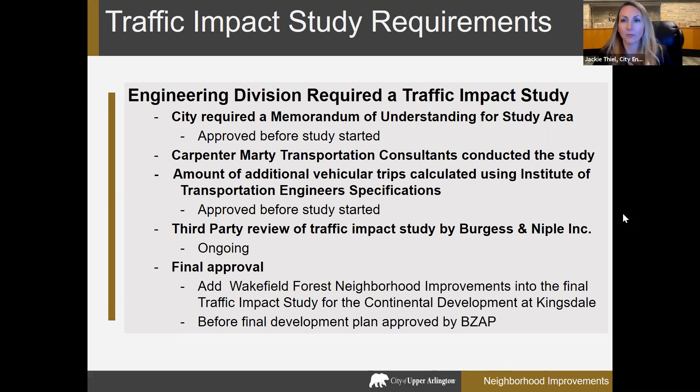And then once the traffic impact study is approved and some other things are worked out, they can take the final development plan back to BZAP for approval.

So the recommendations for improvements related directly to the development that are in the traffic impact study today are, again, improvements to the 5 Points intersection, adding an additional right turn lane on Fishinger eastbound, and extending the turn lanes on Tremont Road southbound. Additionally, we'll be adding fiber to interconnect all the traffic signals between Zollinger and 5 Points so that they can talk to each other. That improves efficiency with the signals and makes it so that when you're driving the corridor, you don't stop at every single red light.

And then a new signal at Ridgecliff Road is proposed there, and a new pedestrian crossing median at the north end of the site. Again, we show that traffic calming at Trentwood, and relocating the current signal on Northwest Boulevard approximately 65 feet south of its current location, to have a perpendicular driveway into this area now, and then signal timing adjustments to the traffic signal at Northwest and Zollinger.

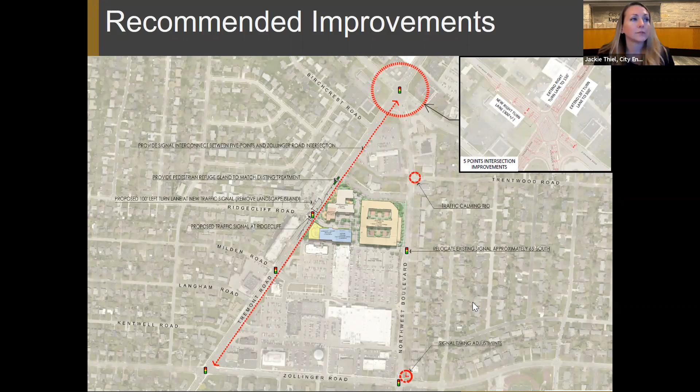So after the last meeting, I heard and listened to many of you, and I know that you wanted to see additional traffic counts and traffic data on the east side of the neighborhood. So we did complete that. And what I tried to do with this map, I know there's a lot of information here, and this will be available for you guys to review after the meeting. We'll send you all links to all the information.

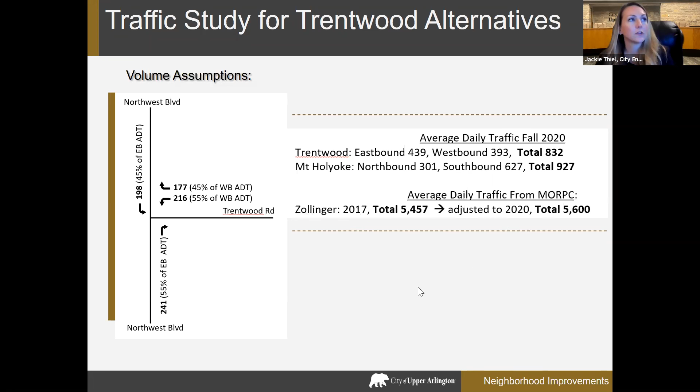That takes us into the next movement assumptions. When looking at the Northwest-Trentwood intersection and restrictions, we needed to assume where these vehicles would go if they couldn't go onto Trentwood. Number one, we assume all southbound lefts from Northwest - so if you're going south on Northwest and turning onto Trentwood - would now enter via Mount Holyoke instead. Then all northbound rights from Northwest would now enter the neighborhood using Zollinger Road.

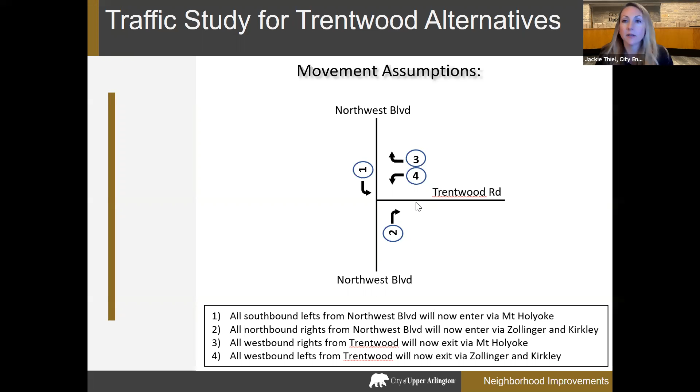Number three, if you're westbound on Trentwood and normally turning north onto Northwest, we assume those vehicles would now exit using Mount Holyoke. And for westbound vehicles wanting to travel south on Northwest, if they couldn't make that movement, we're assuming they would now exit on Zollinger and Kirkley.

So that brings us to look at the different scenarios. We looked at three scenarios for Trentwood, starting with what would happen if we closed Trentwood completely.

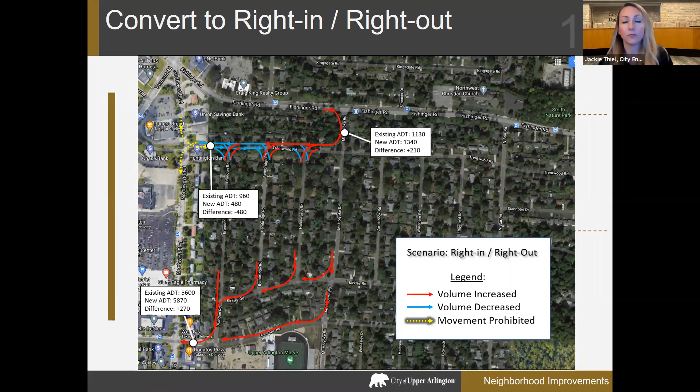You see a milder increase to Mount Holyoke compared to the previous slide with this restriction, adding about 200 vehicles per day. Similarly, Zollinger vehicles entering this way increase about 270 vehicles per day. When you spread those 200 vehicles per day over the span of the entire day, assuming most will be in your peaks, it's not as much of an increase as when we looked at the full restriction.

The third scenario we looked at was converting Trentwood to westbound only from Brandon to Northwest. In this scenario, the yellow shows the prohibited movement that's no longer allowed.

We talked about where these vehicles would go. They would either travel on Fishinger if coming into the neighborhood and then south on Mount Holyoke, or come down Northwest and enter through Zollinger and up into the neighborhood using these streets, per our assumptions. That's also a decrease from the full restriction, obviously.

So we're seeing additional traffic of 210 vehicles on Mount Holyoke, and similarly a 260 increase from Zollinger, funneling into the neighborhood.

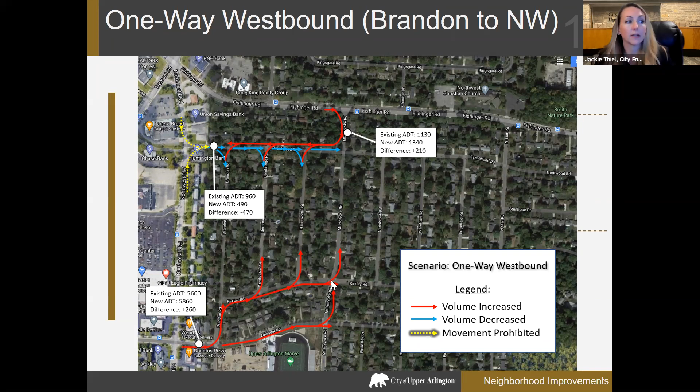Starting in the upper left-hand corner, this is the Northwest Boulevard at Trentwood intersection. Based on the traffic data and the impact it would have under the different scenarios to Trentwood, our recommendation is to make Trentwood one way so that vehicles cannot enter Trentwood from Northwest Boulevard. That was the least impact we saw to the rest of the neighborhood, but with the biggest benefit.

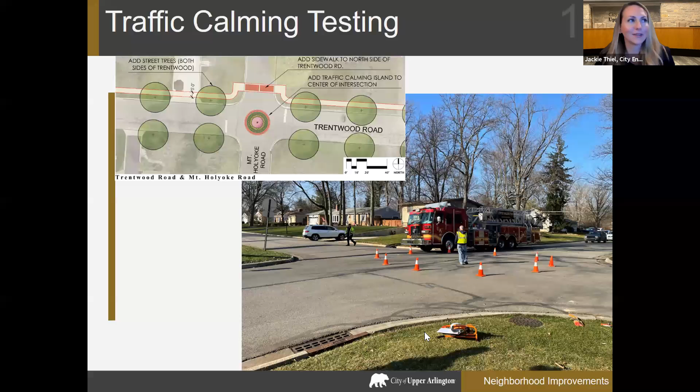So this is what our improvement recommendation looks like now. We still have the 15-foot diameter circle in the middle, which would be landscaped, and then a 5-foot wide band around that, which would be a drivable surface. For the average vehicle traveling, you're not going to want to go on that surface, but for vehicles that need to use it, it would be drivable.

So it still gives you that traffic calming effect and definitely slows down vehicles. It eliminates the long straight shot you see on Mount Holyoke now, and makes that intersection itself safer as well.

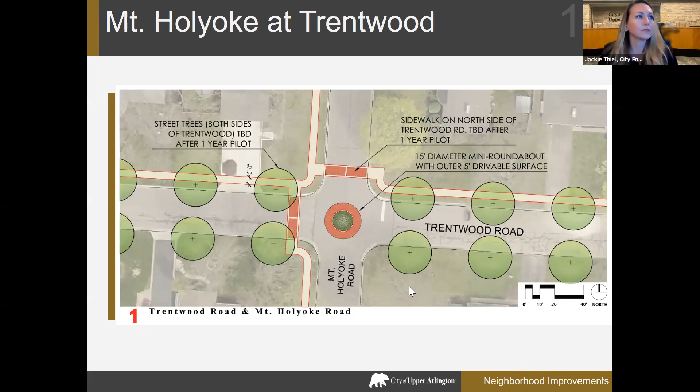This is just taking a closer look at what we could do with the one-way. When we do the pilot, we obviously wouldn't put in any permanent infrastructure improvements at that time. But if we stayed with the one-way after the pilot, which we'll all determine together, this is what that intersection could look like. We'd have a bump out to make the crosswalk shorter, making it clear you're exiting the neighborhood onto the northwest. And this is that crosswalk I spoke about across northwest.

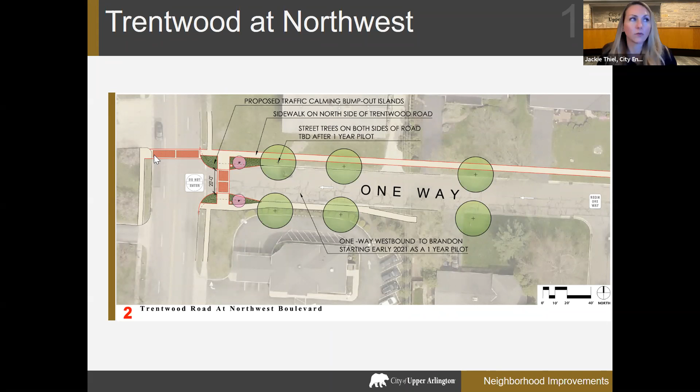Looking at Brandon Road and Zollinger Road, in the previous meeting I showed you two exhibits of what our traffic calming island could look like—there were two options we were looking at. And again, we took our ladder truck out and coned off where the island would be.

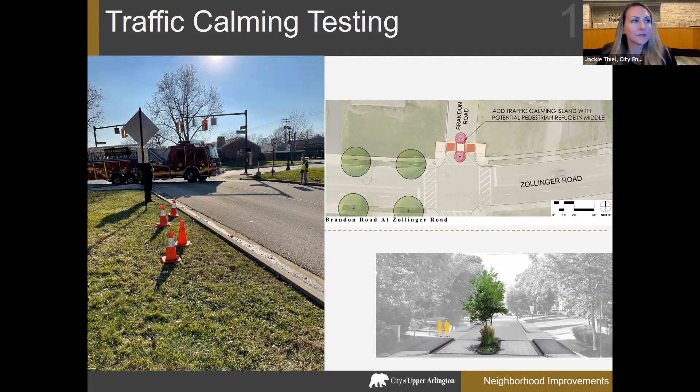Obviously you have a big turning radius with a ladder truck, so we made adjustments so we still had the same traffic calming effect but could still have emergency access to the neighborhood without prohibiting it. By pushing this traffic calming island back 85 feet, you can see we're not intruding into this—this isn't a driveway, it's a front door sidewalk. But we're making those lanes 10 feet wide, which the ladder truck can get through. They'll swing off Zollinger onto Brandon and get through the 10-foot wide travel lane. What that does, going southbound or northbound, is break up your line of sight and force vehicles to slow down with the narrow travel lane.

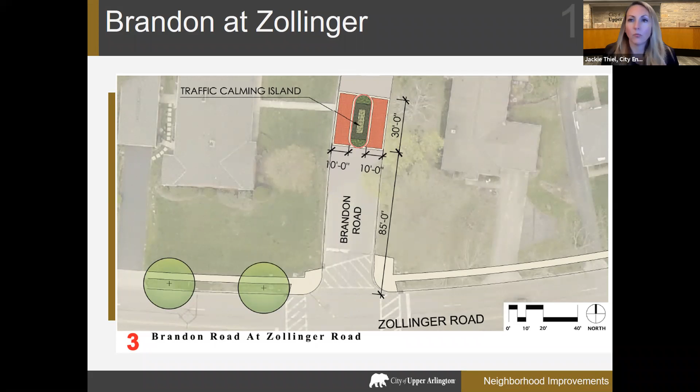Similarly, we heard, and we want to be consistent to some degree with what we're doing, that the mini roundabout on Mount Holyoke's north side was a great idea, but we need something on the south side too to help influence driver behavior and slow vehicles down. So this shows a traffic calming island on Mount Holyoke north of Zollinger Road.

Getting into the placement of these, we have to make sure we're not by driveways here. This again does not impact anyone's driveway, but gives that same traffic calming effect and breaks up the long straightaway you see when traveling on Mount Holyoke today.

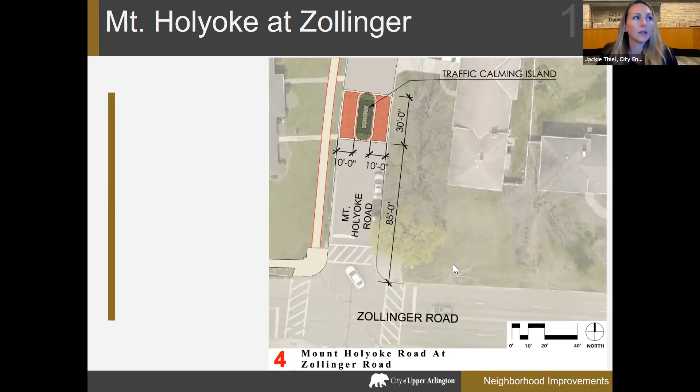So that was a lot of information, and I need a lot of feedback from all of you on this. We did some polls last time, and I have polls to go through again. I want to get your feedback on the adjustments we made and new things that you saw tonight, so that we can all take a look at how we're feeling about everything. I know it's a lot of information, and this is your initial reaction. These polls are just to give us a sense of if we're all on the same page here, or if there's something we're way off on and need to completely adjust.

So I think I have about 9 polling questions. Our first question, and I think you can move the chat box around so you can see the map while you're doing this. But the first question is, do you like the proposed mini roundabout at Mount Holyoke Road? I tried to make the question simpler this time. I know I had a lot of wording in my answers last time, and I tried to give you an option of other if yes, no wasn't clear enough. So I'll give everybody some time to read the question, look at the map, gather their thoughts, and then we'll share the results.

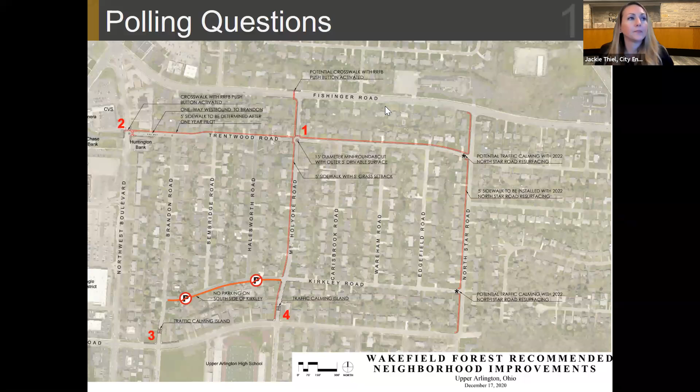So what's next? Shortly here we're going to go through our questions, and then I'm going to allow time for all of you to speak, ask questions, or just make comments in general. After this meeting, I'll be reviewing the poll results a little closer and reviewing comments that are either made in the chat box, or if you speak tonight, or received after this meeting.

We need to add Wakefield Forest improvements into the final traffic impact study for the Continental development at Kingsdale. That traffic impact study must be approved before the submittal of the final development plan goes to BZAP. There's no date for that, but I want to make sure we are all responsive in our efforts of working together, and that I get your needs in there before any deadlines happen.

Based on looking just initially real quick, and I'll keep looking at this, it looks like we're in favor of starting that pilot project in early 2021. There'll be more information going out about that. Obviously we'll work with police. When we first initialize that, we'll have message boards out notifying people of the change in traffic, and police will be giving warnings at first, but we'll have plenty of signage up that alerts people of the change.

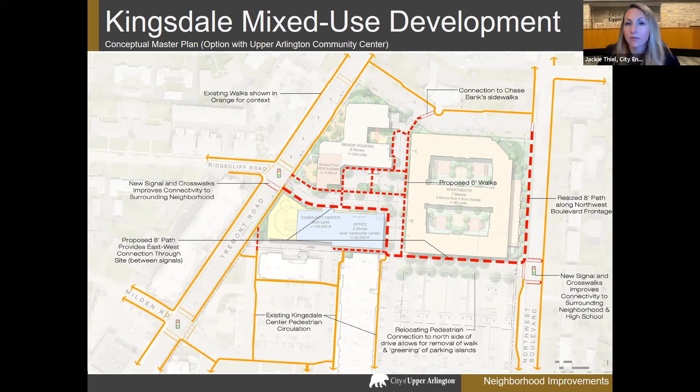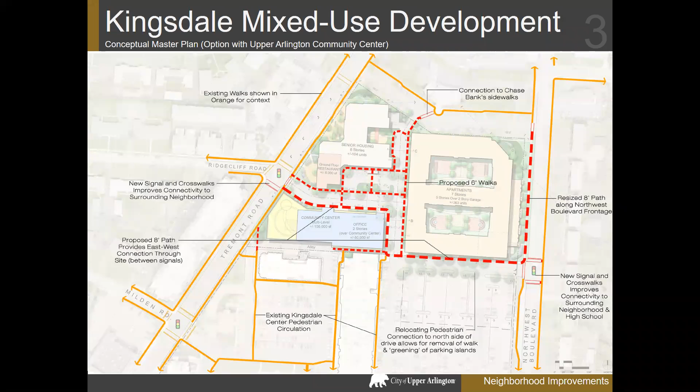My last question is, a lot of neighbors have complained for years, and what's being proposed now will help address those issues we've had in the past. How can we be sure that the new mitigation will also be effective when the additional volume of traffic is added to the equation? Because there's going to be a lot more traffic.

When I look at these volumes, our goal is to install these to deter traffic from coming into the neighborhood. Traffic that's there today, that's not part of the neighborhood traffic, like I showed in the traffic study, there's not a ton of it, but we do see some. By doing this, we wanted to deter any future traffic from coming into the neighborhood. I know these are good first steps, and we need to keep looking at how they perform over time. Once the development is there, we'll have our traffic calming in place. Our hope is that these are doing their job by slowing traffic down and deterring any cut through. But we'll have to keep an eye on it, keep looking at it, and see if adjustments need to be made as time changes over the years.

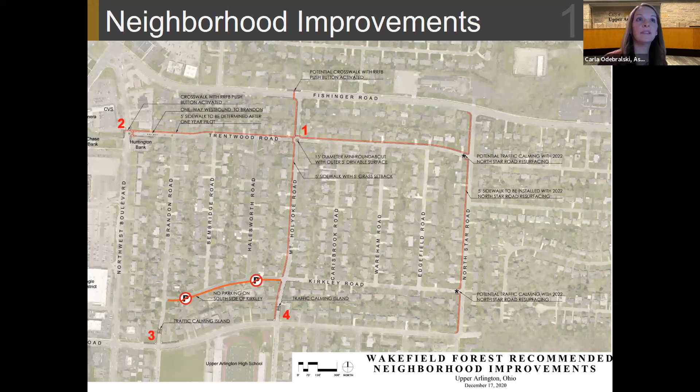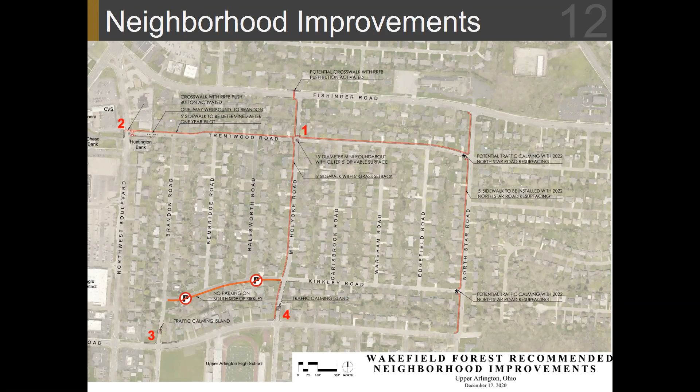Hi, yes, can you hear me okay? Great, thank you. Just a quick question, and I don't want to assume it. When you do the pilot at Trentwood and Northwest Boulevard, I guess to understand the impacts of that, can you put it back to the slide that has the traffic counts on it, please?

There you go, there we are. So I'm just looking at the travel westbound on Trentwood, and we have 407 vehicles a day crossing Mount Holyoke Road, and then really only losing about 14 of those as they continue westbound. We know 400 people don't live west of Mount Holyoke Road on Trentwood. What's the assumption on where those cars are going? I'm assuming they're turning left onto Northwest Boulevard. Is that where you guys landed on that as well?

Correct. So where are those cars going? Well, we said 55% were going. So of vehicles traveling westbound on Trentwood, when we look at it, we have over half of them going south, 55% for our volume assumptions, and then 45% traveling north.

It's just an oddity we looked at, turning to what we think that somebody would drive through the neighborhood and then turn right on Northwest to wait at that light. I think more of them are turning left, but you guys had the counts up and maybe some assumptions as well. So my concern would be if 75% of them are turning left - just a guess that it's closer to that - where are those cars going to go? I'm concerned they're going to go left on Brandon, and since I live on Mount Holyoke Road, I'm concerned they're going to go left on Mount Holyoke Road and travel down to Zollinger and out to Northwest Boulevard. So we can't live on assumptions.

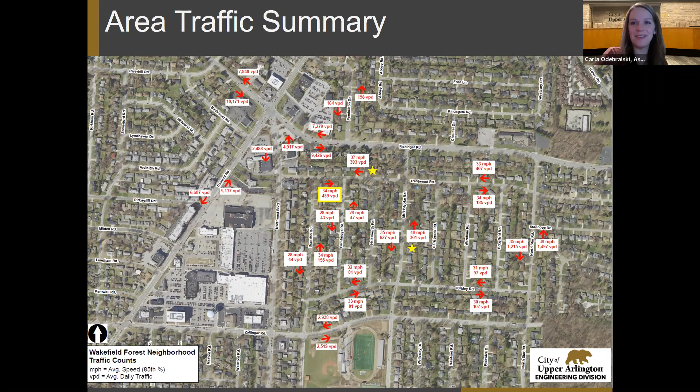You're fine. So I wanted to first off say thank you so very much. This is so much data and so much information and exactly what we need. That being said, I'm appreciative of the pilot and the one-way going right, and I think that'll give us some good data. I know there's a lot of people pushing to close that intersection. But I guess, Jackie, what I want to understand is if you did close that, and maybe we don't go there now, but I think it would help with the pilot for people to understand where, if it was closed, where would all that traffic go?

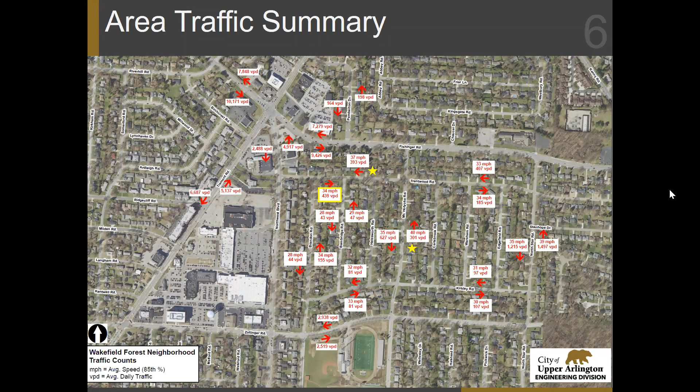I'm really concerned about Fishinger Road, taking a left-hand turn there. There have been people saying, well, they'll just put a light on Fishinger Road. I know things aren't that easy to do. So if you can talk about that, or maybe in a later meeting, give us some data as to what would happen, because a lot of us use that right-hand turn to go to that 5-point intersection and make a safe turn to go west or go elsewhere.

But it gives us time to study the impacts of just this one way, and see if our assumptions are correct on where these vehicles will go, and to keep looking at that traffic so we can make an informed decision together based on the traffic data and the effects it has on your everyday lives towards the end of the pilot project. So hopefully that answers part of your question for now, and more to come as we keep looking at it. Thank you.